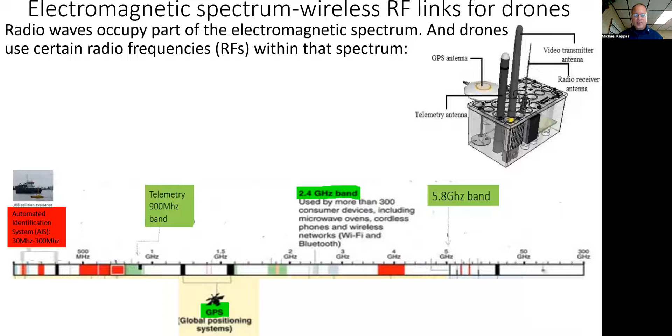30 megahertz to 300 megahertz, and that's for manned and unmanned surface vessels to broadcast their location to other vessels so they don't collide. And that's where that is on the electromagnetic spectrum.

Our last slide in our first class dealt with the microprocessor and the microcontroller, the brains of the unmanned systems. Let's go to a video on this subject.

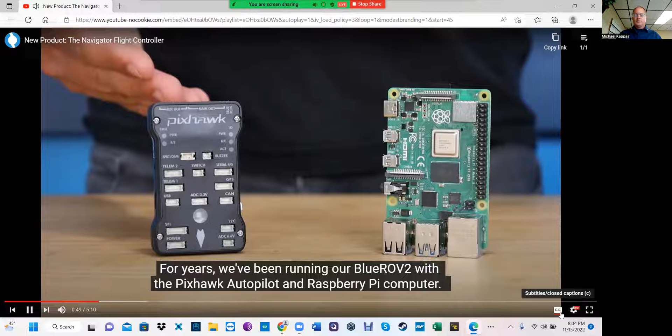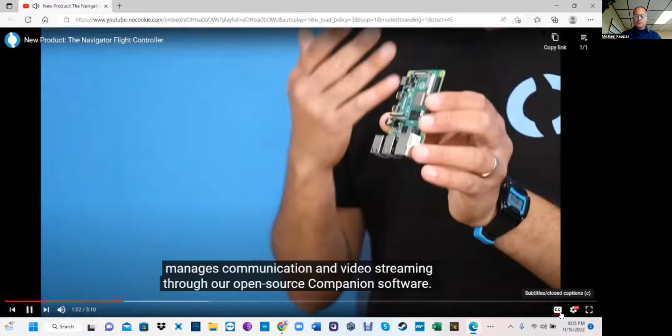For years, we've been running our BlueROV2 with the Pixhawk Autopilot and Raspberry Pi computer. On the Pixhawk runs the ArduSub ROV control software, which is a branch of the larger ArduPilot project that we created and have managed since 2016. The Raspberry Pi computer, meanwhile, manages communication and video streaming through our open source companion software.

The Navigator flight controller replaces the Pixhawk with modern, capable, consolidated hardware. It's a board that plugs into the Raspberry Pi computer's expansion port and transforms it into a fully featured flight controller. It's focused on marine robotics applications like the BlueROV2, but not limited to just that. You can also use it to control drones, ground robots, or anything that moves, really.

Okay, so unmanned surface vehicles. Above water, they use radio waves for communication and imaging. Underwater, they use acoustic waves for communication and imaging.

In just a moment, we're going to see a video on unmanned surface vehicles. Unmanned surface vehicles are more capable, flexible, and cheaper than other vessels. They can vary in weight from tens of kilograms to thousands of kilograms, with speeds that can vary from 1 meter per second to 20 meters per second.

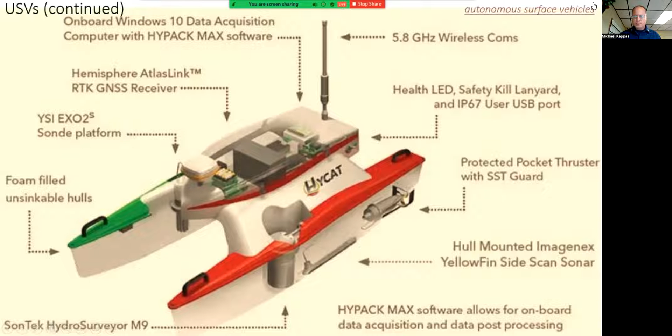USVs can be controlled remotely by a human operator and may also have autonomous functionality. Many USVs can alternate between full autonomy, semi-autonomy, or manual control.

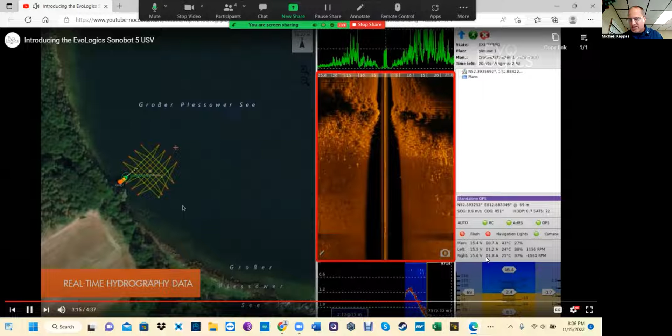Here we see a USV. It is programmed to follow a route, using sonar scanning. Here's the imagery, and here's the telemetry data back from the drone in its environment. The surface vessel is following its program to follow this route and conduct sonar scanning to produce underwater imagery.

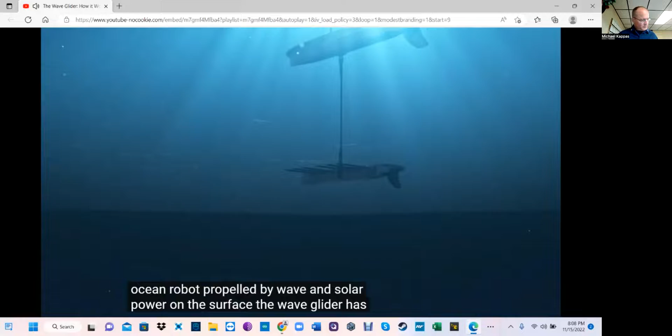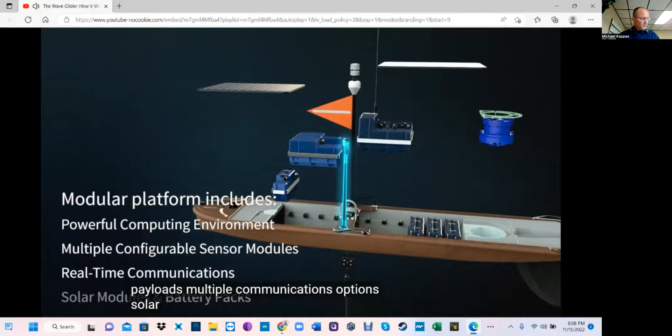And information. The wave glider is designed to capture both. It's the world's most experienced ocean robot, propelled by wave and solar power. On the surface, the wave glider has everything needed for a self-contained data collection system: a powerful computing environment, scalable flexible payloads, multiple communications options, solar panels and battery packs to power it all.

The wave glider's innovation only begins at the surface. Below the surface is a sub attached by an umbilical cord that captures wave motion and transforms it into forward motion. As waves move the float up and down, wings on the sub rise and fall, propelling the vehicle forward. The slightest wave motion is enough. A solar electric thruster is available for extra speed when needed.

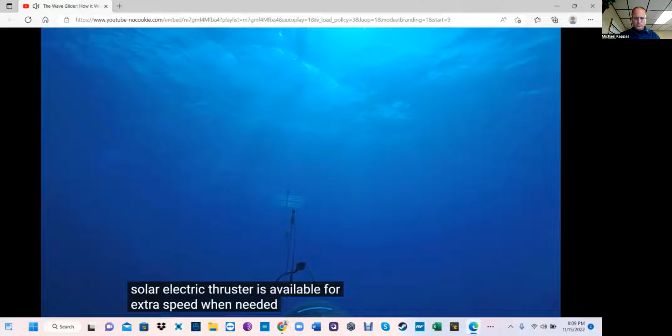Wave gliders can tow large payloads, hit speeds up to 3 knots, and be out at sea for many months at a time. Wave gliders have done some amazing things - they've crossed oceans, survived the toughest of conditions, gathered data from ocean depths to the surface, autonomously communicated with other assets, and even set a world record.

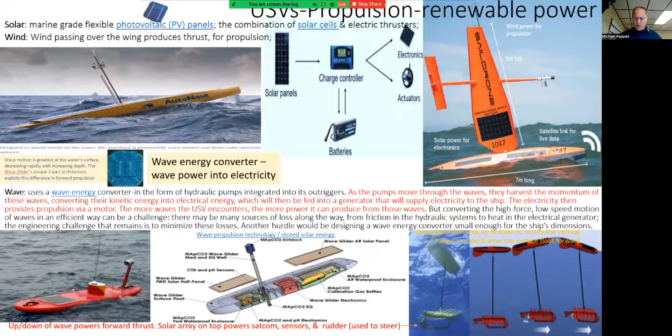Renewably powered unmanned surface vessels are unique. They're distinct from other unmanned systems. Now let's talk about the components of an unmanned surface vessel.

Other components include receiver, battery, microprocessor and or microcontroller, and electronic speed controller. You may remember this from quadcopters. In this particular case, the ESC can be used in cars, ships, and underwater thrusters.

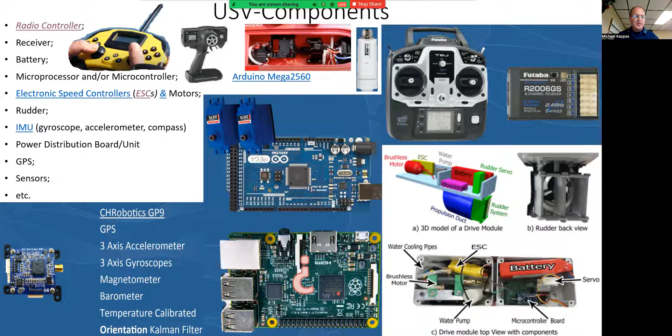Other components include the rudder, the IMU, which includes a gyroscope, accelerometer, and compass, power distribution unit, GPS, sensors, and more. Here's another picture of the components, and you might notice that many of these are the same as those on quadcopters. Others are unique.

For example, cooling pump and cooling reservoir. The ESC or motor of an unmanned surface vessel or unmanned underwater vehicle may need water cooling so that they do not overheat. This may consist of tubes running through the ESC that keep it cool, or a cooling pump, reservoir, or fan.

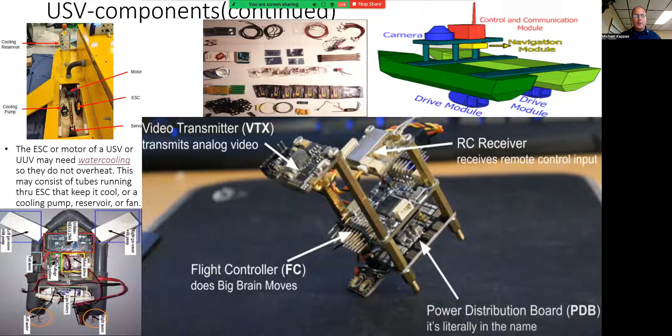Aerial drones have air circulating through the components, so they don't use cooling pumps. Power being delivered with these high voltage systems is something to consider when you're picking out your ESC.

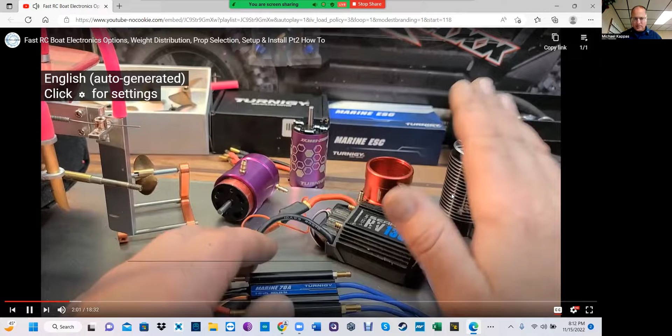Next, you want to make sure you get an ESC that has water cooling. This has water pickups and tubes running through the ESC that keep it cool, as opposed to an ESC that has a built-in fan. Water pickups with water cooling help your brushless system run much cooler and more efficiently.

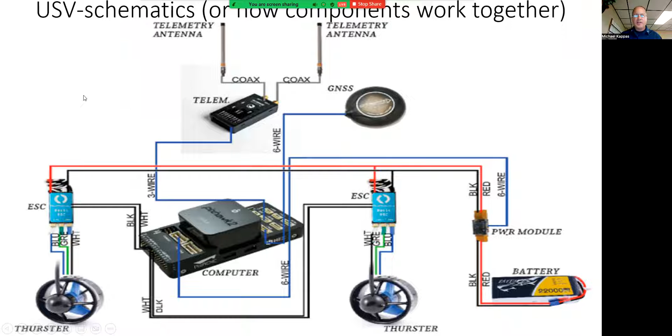Now we're going to get into the motor choices. You want to choose a motor that's going to fit your boat. This is water cooling for maritime drones. Here is the schematic of an unmanned surface vessel, showing how the components work together.

USVs can have space-based sensors, surface-based sensors, and subsea sensors. A USV may have several sensors for imaging and aquatic observation, for example FLIR, forward-looking infrared.

LiDAR, light detection and ranging, is a scanner sensor. It measures the distance to one target point by illuminating it and analyzing the reflected light. LiDAR targets an object on the surface with a laser and measures the time for the reflected light to return to the receiver. The three main components of a LiDAR instrument include the scanner, laser, and GPS receiver.

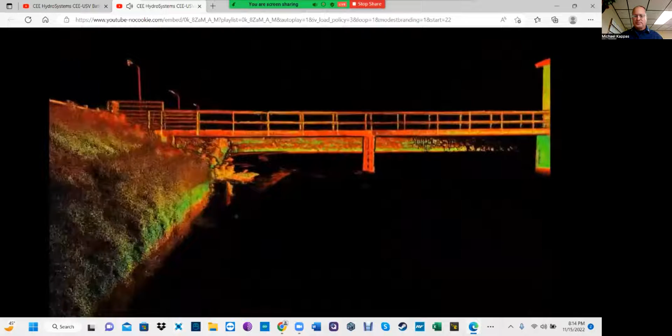Here we see an unmanned surface vessel doing some LiDAR scanning, taking imaging with the LiDAR camera on the mast. And here's the actual image, the LiDAR imaging. This is what it looks like. LiDAR pulses out, and LiDAR returns the form of this image.

USV sensors for navigation: a USV may have several sensors for navigation. Obstacle avoidance is important due to the variability and diversity of the marine environment.

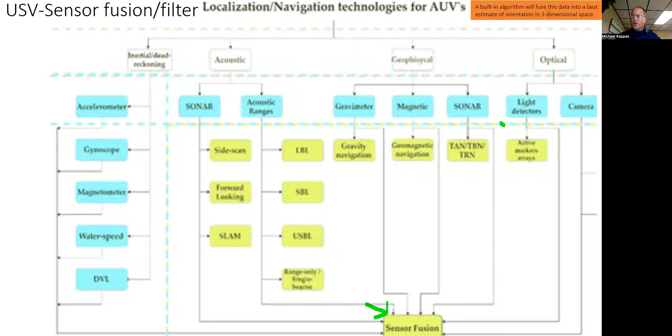Now you may think those are a lot of sensors. How can I handle all that information? Well, you're not alone. The vehicle also has a challenge handling all the information from all these sensors. That's why it has a built-in algorithm that will fuse this data into a best estimate of orientation in three-dimensional space. It's called sensor fusion, a software for sensor fusion of all these sensors, and it's often called a Kalman filter.

Let's talk about software on unmanned surface vehicles. Here's a video from Europe that deals with software, navigation sensors, and aquatic observation sensors, including water velocity. So how does it work?

It all starts with planning a monitoring and treatment mission. The Dronic system is supplied including software and a base station. With these tools, a user can indicate the lake and its contours, upload other data, and hence determine the path in the lake that the Dronic master will monitor once it's deployed.

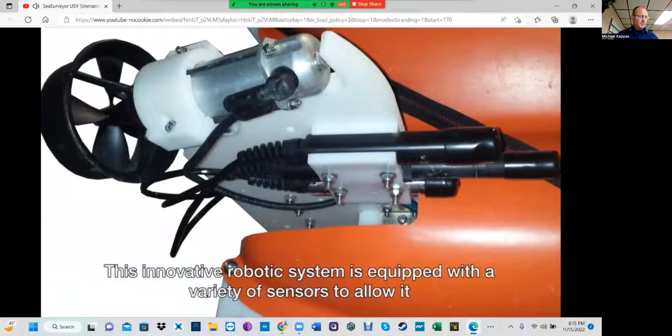After the mission is set, a user-friendly and robust master USV is released in the water. This innovative robotic system is equipped with a variety of sensors to allow it to navigate through the lake independently and to locate the blue-green algae hotspots.

Among others, it's equipped with echo sounders for underwater obstacle avoidance and 3 range sensors for above-water obstacle avoidance. The system communicates with the base station in real-time through a long-range Wi-Fi connection, which makes it possible to interact with the mission at any given time.

A camera on board the system allows real-time supervision from the shore. Through GPS, the Dronic can position itself in the lake and upload water quality data along with its location.

The robotic boat can operate and navigate in 2 modes. Either it follows a predefined track, or it navigates in an adaptive way based on real-time analysis of the recorded sensor measurements. The former mode is used to cover and map the entire area of interest. The latter mode can be used to search for a maximum value of a specific parameter.

The boat is battery powered, and its economic engine design allows it to operate for 8 consecutive hours, since the correct control of the vehicle's actuators is essential for optimal manoeuvrability of the Dronic.

Embedded software and sensors for measuring algal concentrations enable the master USV to track down algal hotspots and autonomously change course, or send the slave USV to the hotspot based on these findings. In addition, software for obstacle avoidance makes sure that the equipment is safe to operate, even when the lake is in use

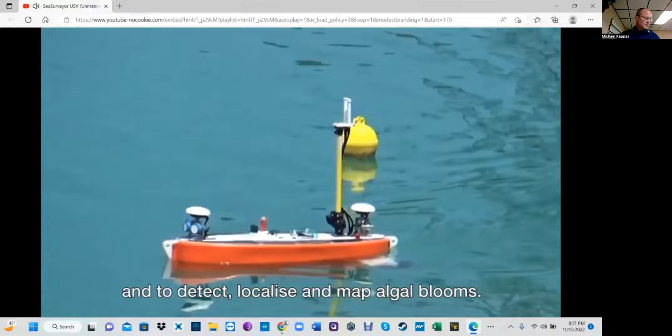recreationally. The master USV is used to analyze the water quality and to detect, localize and map algal blooms. Essential parameters are monitored, such as photosynthetic pigments, chlorophyll A, phycocyanin, turbidity, temperature and depth level.

The monitored data is transferred to the web-based software. Once the master USV has found an algal bloom, a second drone is launched to neutralize the threat using ultrasound waves, providing a direct and localized treatment.

Okay, there's other software. We should be familiar now with the ArduPilot project used with quadcopters. Let's take a look at ArduPilot Mission Planner used with unmanned surface vessels.

Okay, and there's other software. But let's talk about types of unmanned surface vessels. They come in all shapes and kinds, including water rescue robots, robotic buoys, and more.

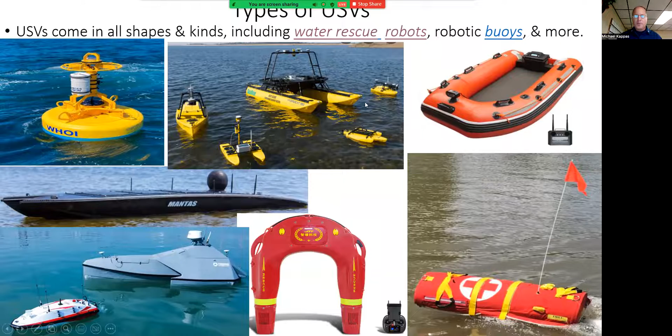Okay, let's move right along. We'll talk about model radio control boats for recreation, for sporting.

All right, finally, Traxxas Spartan, the boat. I get to run it today. Here are my two cell LiPo packs. I could run 6S in this, but I haven't driven it before, so I don't want to go crazy on my first run. Look at 12,800 mAh on this 2S LiPo from Gens Ace. That's going to give me, I'm guessing, around 7 or 8 minutes.

We'll see. Radio's on. Everything's pretty much stock except for some aluminum upgrades I've done to the back. I'll show you what I mean. Just want to get this going.

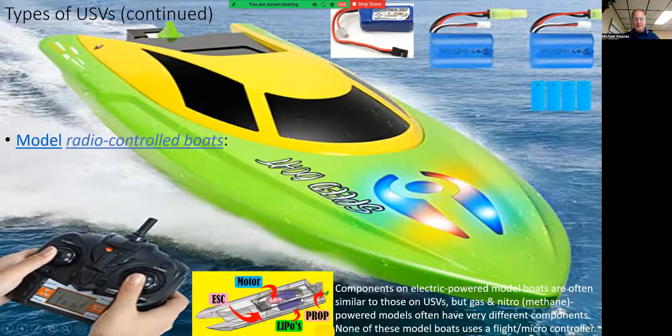Okay, now we're going to talk about unmanned underwater vehicles. These vehicles can be remotely operated vehicles controlled by a remote operator, or autonomous underwater vehicles operating independently from direct human input.

Here are two unmanned ocean explorers. Can you spot the difference? An AUV, or autonomous underwater vehicle, explores ocean depths without any attached cables. Researchers drop an AUV in the ocean and pick it up at a pre-selected position. An ROV, or remotely operated vehicle, is also unmanned, but is connected to a ship by cables. A person on the ship drives it around.

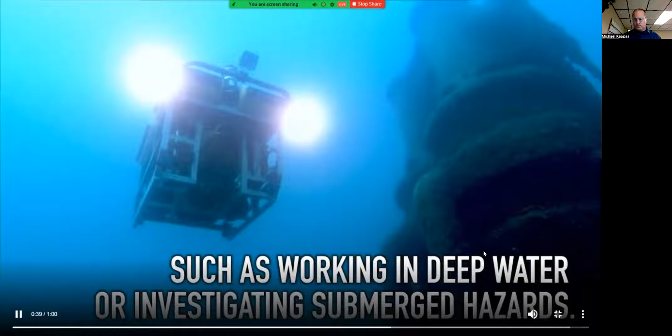ROVs are often used in situations where diving by humans is either impractical or dangerous, such as working in deep water or investigating submerged hazards. ROVs and AUVs carry equipment like video cameras, lights, and robotic arms to grab samples for study. By going where humans can't go, these underwater robots help us safely study the ocean.

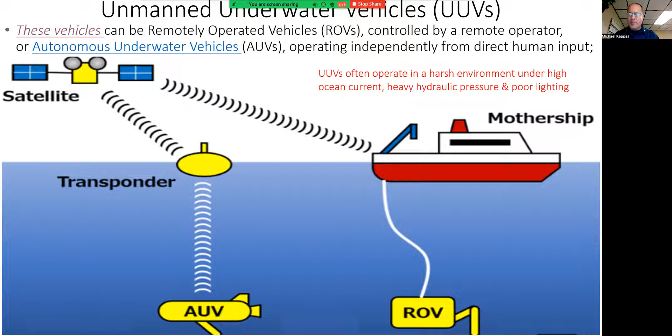Okay, let's talk about thrusters. Autonomous underwater vehicles can rely on a number of propulsion techniques, but propeller-based thrusters are the most common by far. These thrusters are powered by an electric motor, which is powered by batteries. One of the components of this is the electronic speed controller. The T200 is a three-phase brushless motor, which means that unlike a lot of motors, you can't just connect it to power and expect it to spin. It needs an electronic speed controller to work.

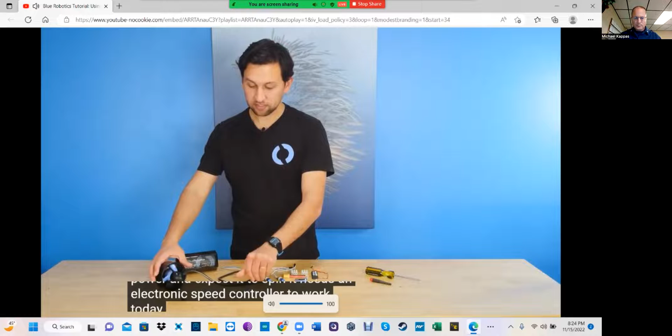Today we're going to be doing that with this basic ESC, which is an electronic speed controller for any sensorless brushless motor, but we're going to be using it on the T200. The basic ESC has a couple wires coming off of it: a red and black wire for power input to the speed controller, and three wires that connect to each of the three phases of the thruster. You can see there are matching colored wires on the thruster.

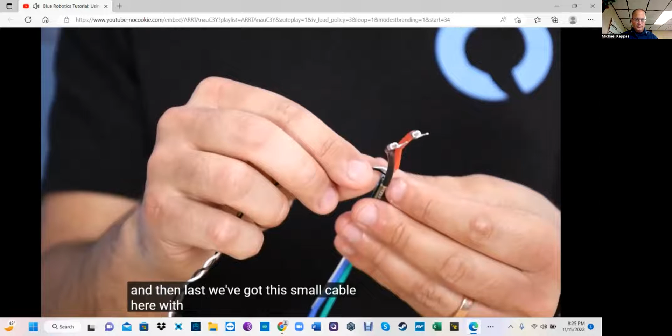And then last, we've got this small cable here with a little connector. This is the PWM input signal that's actually going to control the speed of that thruster. The electronic speed controller interprets the control command sent from the flight controller to the motors. It tells the motors what to do.

Video transmission systems on unmanned underwater vehicles. Underwater real-time video transmission is challenging due to frequency-dependent signal attenuation, ambient noise, multipath distortion, propagation delay, and the Doppler effect. High data rates are required to relay video. Unfortunately, underwater communication has low data rates and very limited transmission bandwidth because it uses acoustic waves instead of electromagnetic waves. AUVs are wireless and cannot transmit live video images.

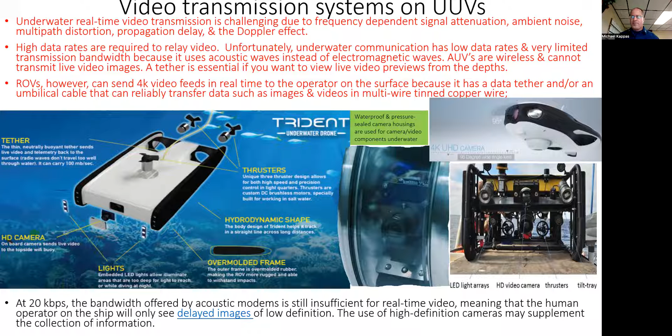A tether is essential if you want to view live video previews from the depths. ROVs, however, remotely operated vehicles, can send 4K video feeds in real time to the operator on the surface because they have a data tether and or an umbilical cable that can reliably transfer data such as images and videos through multi-wire tinned copper wire. Note, waterproof and pressure-sealed camera housings are used for camera and video components underwater.

Okay, let's talk about sensors for imaging and aquatic observation on unmanned underwater vehicles. Forward-looking infrared cannot see through glass or water. Traditional thermal imaging doesn't reach below the surface of the water.

Sonar is long-distance acoustic communication. The speed of sound waves allows sonar to be extremely useful for seafloor imaging. But because of the noise and interference sound waves produce, there are risks to marine life. In addition, background noise and other errant sound waves often interfere with the accuracy of the data. Still, sonar is the most viable choice.

Let's look at light and optical imaging. It has limited range, and it's more accurate in clear water.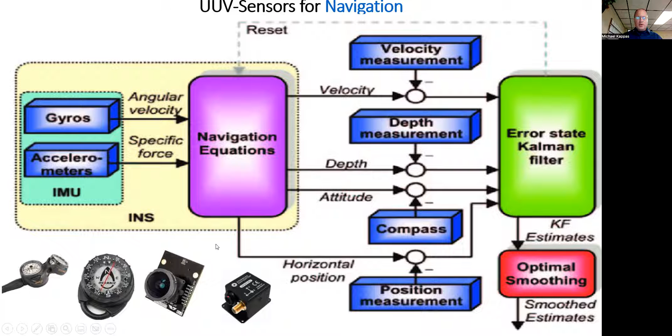Now let's talk about the sensors for navigation in unmanned underwater vehicles. You can use some of the sensors, including a depth gauge, a compass, a camera, and an inertial navigation system.

You can also use sonar for unmanned underwater vehicle navigation. Sonar can be used as an echo sounder to measure the vertical distance between the vehicle and the hard bottom, as a sector scanning sonar to scan for objects horizontally around the vehicle, and for acoustic positioning.

Let's take a refresher on what acoustic positioning is, lat-long readout. Now, GPS radio signals don't pass through water, so we have to use this special system called USBL, basically a set of sonar beacons that allow for the triangulation of the ROV, and a GPS chip at the controller lets the system correlate data and create an accurate lat-long of the position of the ROV.

Now let's look at this video of the acoustic positioning systems that can be used for navigation of the underwater vehicle.

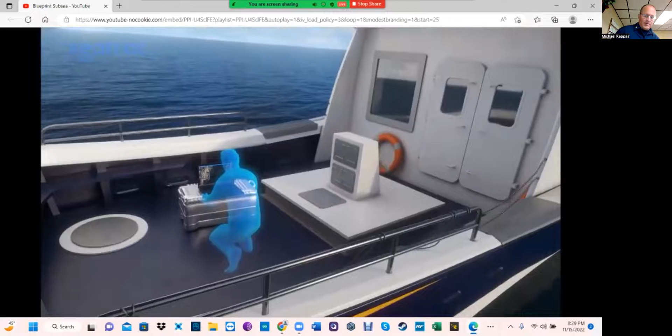Underneath the boat, they've got a transducer. A transducer sends out sonar signals in the form of sound waves and receives return echoes.

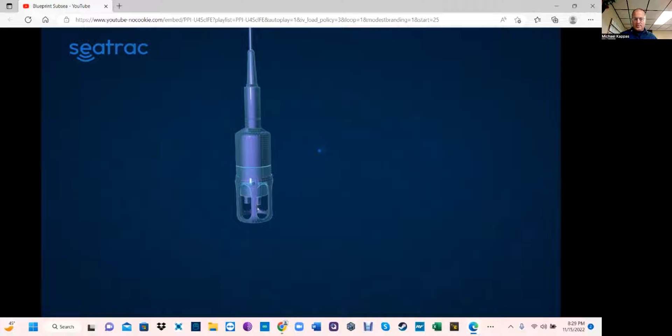You're going to see this right here in the form of binary data. And on the ROV, it has a beacon, a transponder, which receives acoustic signals and transmits a unique return signal.

You'll notice there's also a diver and an autonomous underwater vehicle that are also getting in on the action there.

Now we're going to look at side scan sonars. They come in two forms. The first is towed by this surface vessel. There's a cable underneath this surface vessel towing a side scan sonar, which is conducting sonar imaging underwater to produce an image, which you're going to see on your screen here in the upper right-hand corner. See the image underwater? That's a side scan sonar, being towed by the surface vessel.

And here's another example of a side scan sonar, but this time it's embedded in an autonomous underwater vehicle. These are all acoustic positioning systems.

Lastly, there's multi-beam imaging sonar, and this is on a remotely operated vehicle. You'll notice this remotely operated vehicle has the cable connecting it to the surface. Through that cable comes power from the surface and instructions from the pilot. Back to the pilot from the ROV are the data that the underwater vehicle collects, including video images and sonar imagery. This is multi-beam sonar scanning.

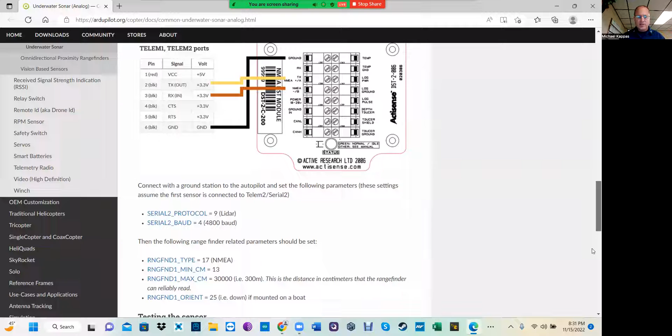Q Ground Control, the background on this slide has QGroundControl software, you can see right there. Let me also mention that ArduSub is the sub-project under ArduPilot for underwater projects.

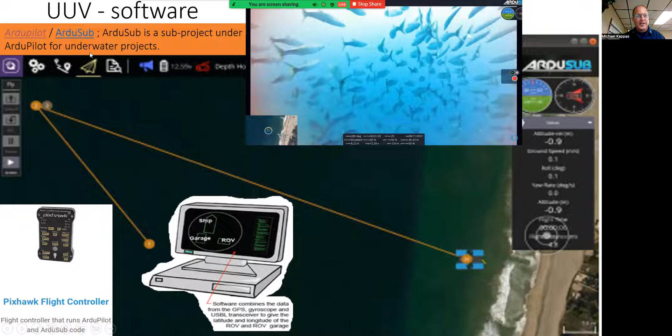Moving right along, unmanned underwater vehicles use waterproofing and pressure proofing of components. That's why you need water cooling, because they're encased, so components sometimes heat up and need to be water cooled.

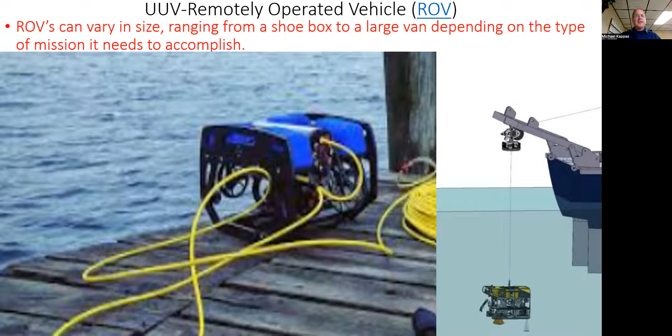Now we're going to talk specifically about one type of unmanned underwater vehicle, the remotely operated vehicle. ROVs can vary in size, ranging from a shoebox to a large van, depending on the type of mission it needs to accomplish.

ROVs operate in midwater or very near the bottom. There are four main types of ROVs: a work class ROV, a light work class ROV, an observation class ROV, and a micro or mini ROV.

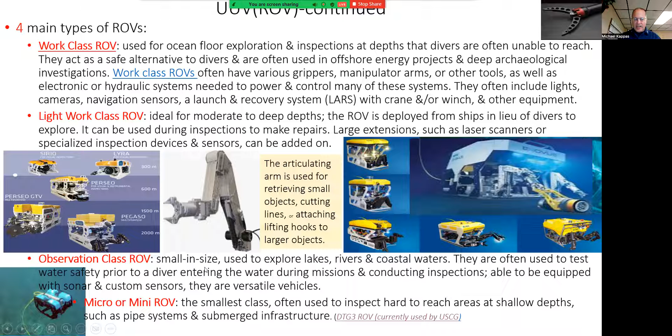Let's take a look at a mini ROV that's used by the Coast Guard. This is a Deep Trekker DTG-3.

All-in-one control system. Seamless sensor and sonar integrations. Simultaneous integration of sonar and USBL. ROV on moving map display, real-time route and log. That's getting that telemetry back.

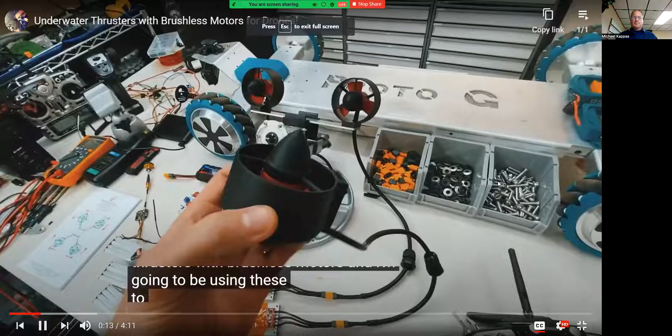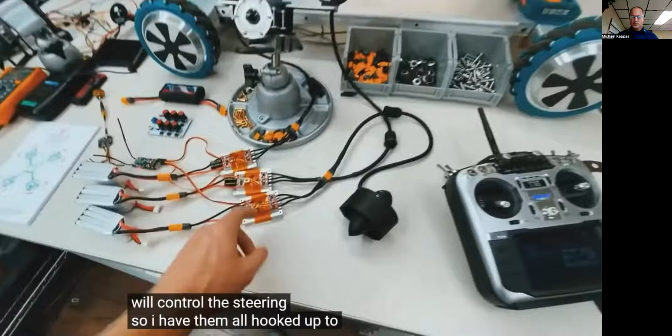Hey guys, so I found these underwater thrusters with brushless motors, and I'm going to be using these to design my underwater drone, and I'm going to make the drone look kind of like a stingray. I'm going to have two thrusters under the wing, and then a third thruster in the back to control the tilt of the drone, and the other two will control the steering. I have them all hooked up to the ESCs here. To use these, you want an electronic speed controller that is reversible, so you can reverse the direction of the thrust underwater.

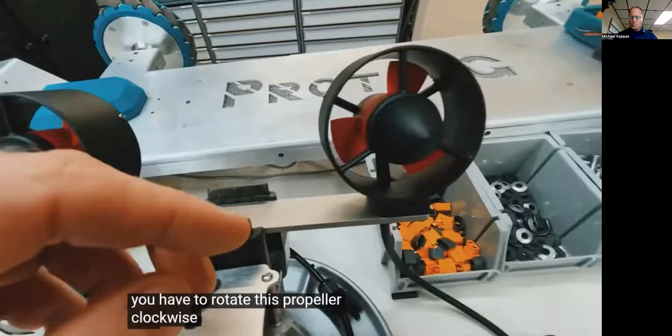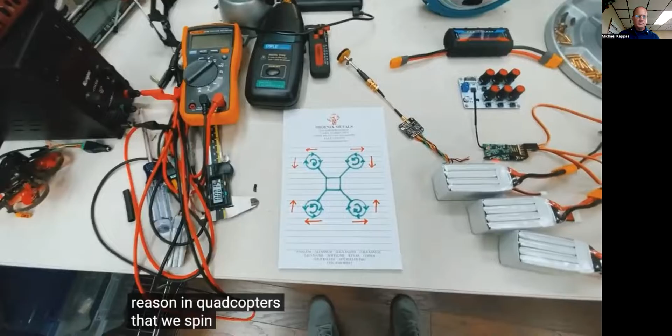I also wanted to go over the direction of rotation. If you look closely, these two propellers are mirrored images of each other. Depending on which way you look at this, to produce forward thrust, you have to rotate this propeller clockwise, and to produce forward thrust out of this one, you rotate the propeller counterclockwise. The reason for this is the same reason in quadcopters that we spin the propellers in different directions. When you spin a motor, there's a reactionary force opposite to the direction of rotation, and this is how we control the yaw with the quadcopter as well. So for the underwater drone, if I had two motors spinning the same direction, it would want to drift, so having the two motors spin in opposite directions cancels out those reactionary forces.

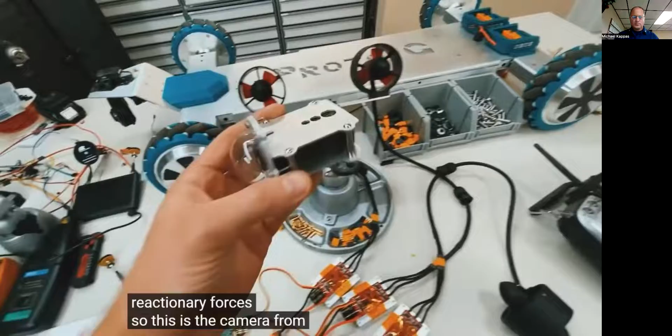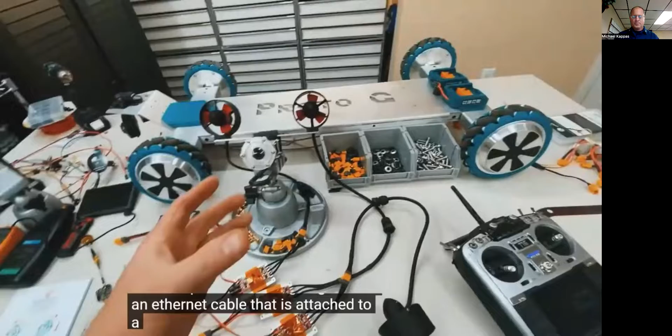So this is the camera from the last video, and to get the live feed to the headset and the FPV monitor, I'm going to have an Ethernet cable attached to a flotation device, which will have the antenna for the FPV transmitter, as well as the antenna for the actual control of the ESCs.

That way, if I give it a 25-foot tether, I can basically have a tetherless experience where the drone can go out a mile and then dive 25 feet. If I put a 50-foot tether on it, it'll dive 50 feet. But I'm going to actually start with a 25-foot tether.

To demonstrate the reactionary force, we can use this motor that's not connected to anything. You can see it's rotating in the opposite direction that the propeller is spinning.

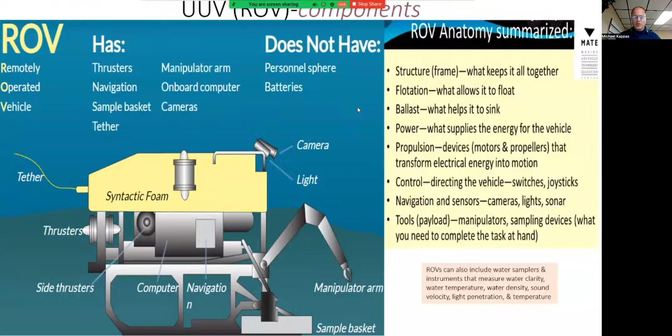Components of the ROV. Here's some more components, and let's look at another video describing components of an ROV in detail, comprehensively, more or less.

The BlueROV2 is a remotely operated underwater vehicle with a camera, lighting, and thrusters that allows you to explore, inspect, and study things underwater. For the purposes of this video, I'm going to assume you already know what an ROV is, and I'll focus on the specific features of this ROV.

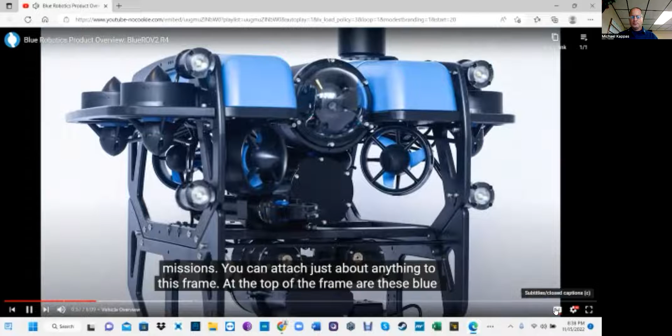Let's get into it. The ROV frame has 2 side panels, a bottom panel, and 4 center panels, creating a rectangular structure and providing places to mount the enclosures, the thrusters, the buoyancy, and the ballast. This design is inspired by work-class ROVs, which typically have a similar structure, allowing things to be easily added to the ROV for different missions. You can attach just about anything to this frame. At the top of the frame are these blue fairings, which hold polyurethane buoyancy foam, used to give the vehicle additional buoyancy.

On the bottom here are stainless steel ballast weights. They can be added, removed, or moved around to balance the vehicle and maintain neutral buoyancy based on what you have installed. The buoyancy on top and the ballast on the bottom makes this vehicle statically stable, meaning that when it sits in the water, it always wants to sit upright and stable.

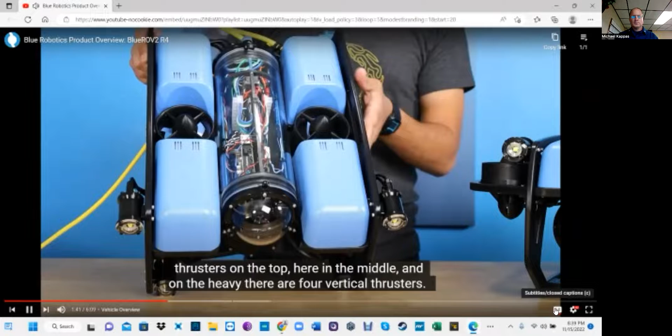There are 6 thrusters in this standard configuration, and 8 thrusters in the heavy configuration over here. On the standard, there are 2 vertical thrusters on top in the middle, and on the heavy, there are 4 vertical thrusters. Those vertical thrusters help you go up and down.

Then there are 4 thrusters on the bottom in what's called a vectored configuration, where each of these thrusters is at roughly a 45-degree angle. The thrusters themselves don't rotate, but by varying thrust on each thruster, you can create a thrust vector in any direction. That means you can drive the vehicle forwards, sideways, or anywhere in between, like off to a 45-degree angle.

This configuration is ideal for driving in real-world conditions where there's often currents coming from different angles, and you want to move the vehicle sideways as you inspect or view a surface.

At the center of the ROV are 2 enclosures. These were both updated to our improved locking enclosure design in the R4 version of the ROV. On top is the electronics enclosure, and down here on the bottom is the battery enclosure.

The electronics enclosure has a camera at the front with 1080p high resolution and sends a live, low latency stream up to the surface for the pilot view. Behind that are the rest of the electronics.

Right here is the Navigator flight controller running BlueOS, which is also a new improvement on the R4 version of the ROV. The Navigator consists of a Raspberry Pi computer with an array of added sensors, inputs and outputs, and expansion capabilities. It uses its onboard sensors to determine the attitude and heading, and outputs to the thrusters to automatically stabilize and control the vehicle based on pilot inputs.

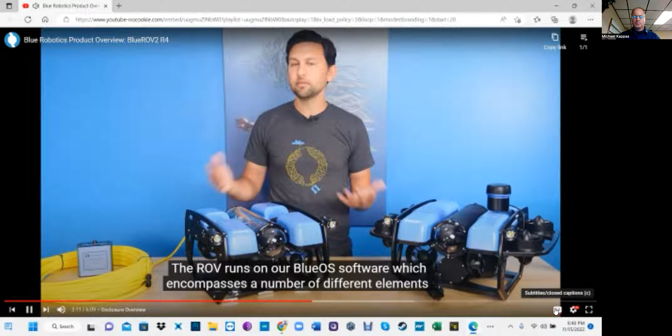The ROV runs on our BlueOS software, which encompasses a number of different elements and is open source and user modifiable for your application if necessary. BlueOS manages the operation of the vehicle, including the ArduSub control system software, the camera, the communications through the tether, and it has expansion features to support other sensors, sonars, and payloads.

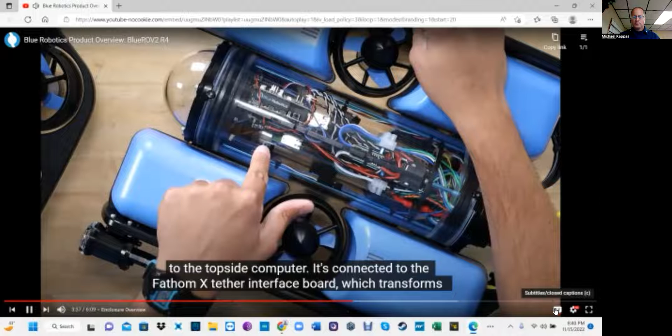The Navigator connects to the Ethernet network that connects the vehicle to the surface and forwards the video stream and control data to the topside computer. It's connected to the Fathom X tether interface board, which transforms that Ethernet connection into a long-range connection over just 2 wires. And last, there are 6 speed controllers mounted at the back, connected to the thrusters and to power.

On the outside of the enclosure, at the back, are cable penetrations leading to the thrusters and lights, as well as a pressure and temperature sensor, a pressure relief valve, and several blank penetrations for expansion.

Below the electronics enclosure is the battery enclosure, which holds a battery during operation. The battery typically gives you about 3 to 4 hours of operation in normal conditions.

Starting with the new R4 version of the ROV, you can choose either acrylic plastic or aluminum enclosures. The acrylic enclosures are rated to a depth of 100 meters, and the aluminum enclosure increases that to 300 meters.

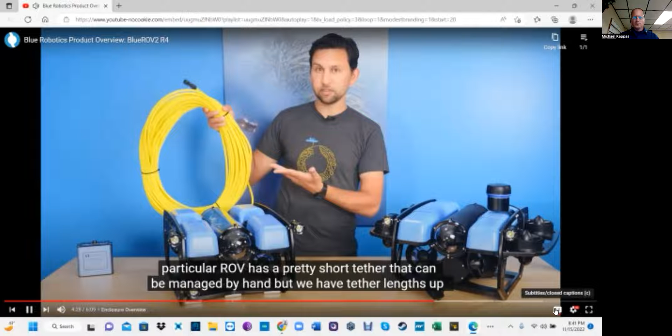The tether on this vehicle runs from the vehicle to the surface. This particular ROV has a pretty short tether that can be managed by hand, but we have tether lengths up to 300 meters, and we have an optional tether spool to manage those longer lengths of cable.

At the surface, this cable plugs into the Fathom X tether interface, or FXTI box, which has a connector for the tether and a USB connector to go to your laptop computer.

Once you're connected and powered up, you connect to the vehicle using the QGroundControl software. That one's also an open source software application, and it runs on Windows, Linux, or Mac, and provides live video stream, live data view, ability to adjust the parameters on the vehicle, and an interface to any gamepad or joystick controller to pilot the vehicle.

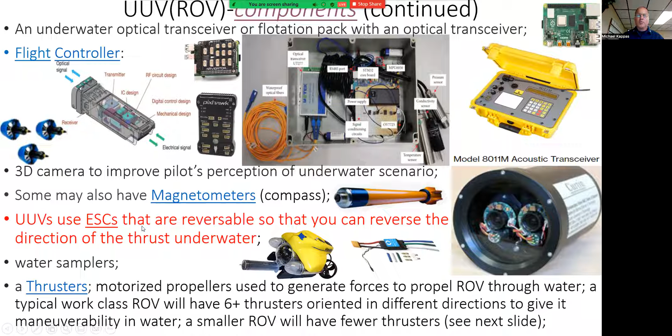Each vehicle can be different and so can have different or unique components. Unlike aerial drones, unmanned underwater vehicles use electronic speed controllers that are reversible so that you can reverse the direction of the thrust underwater. Brushless direct current motor.

This, together with the batteries, is the heart of the ROV. It is the element which gives the propellers the power to generate thrust. Thrusters generate propulsion for the ROV. Most work-class ROVs use a combination of electric and hydraulic power underwater.

The frame of an ROV provides a structure to attach the thrusters, camera, lights, tether, and other components of the ROV. ROVs are often assembled using a box-shaped steel, aluminum, or plastic polyvinyl chloride frame.

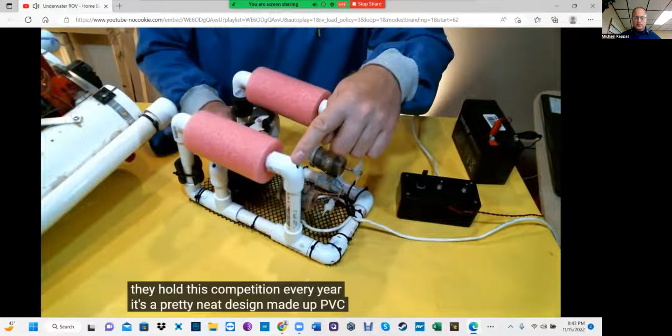This is a pretty neat little ROV. It was developed by the Office of Naval Research as part of their SeaPerch student competition, which they hold every year. It's a pretty neat design made out of PVC pipe, with some flotation foam on it, and 3 motors housed in film canisters filled with wax to seal.

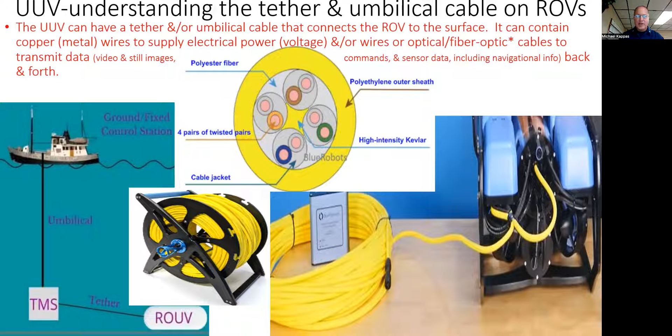The tether: the unmanned underwater vehicle can have a tether and/or umbilical cable that connects the ROV to the surface. It can contain copper metal wires to supply electric power, and/or wires or optical fiber optic cables to transmit data back and forth to the surface.

Let's talk about the radio transmitter. Surface controls can range from something that looks like the control room for a spaceship to something as simple as a smartphone. In any case, the surface controls provide a physical interface for the pilot to control the vehicle and a display of feedback from the vehicle, including the camera view.

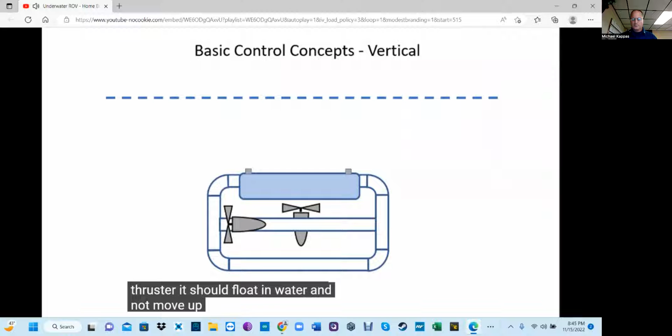Let's talk about movement of the ROV. Vertical motion is achieved using the up and down thruster, the thruster in the middle. I activate the thruster, shown here by the green propeller, and it pushes the ROV down. If I stop the thruster, it should float in water and not move up and down if it's somewhat neutrally buoyant. I reverse the thruster, shown here in red, and the system moves back upwards.

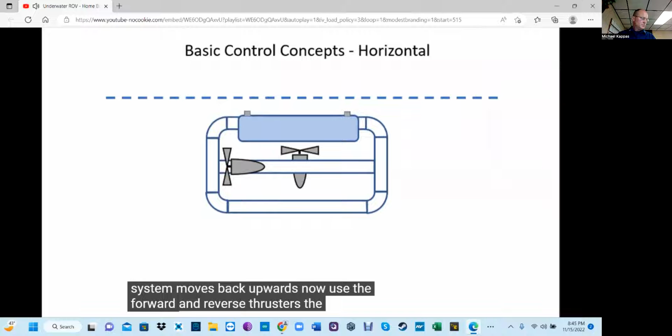Now I use the forward and reverse thrusters, the thruster on the left, for horizontal motion. I activate the motor, shown here with the green propeller, and it pushes the ROV forward. If I stop the motor, it stops in place. If I reverse the motor, shown here in red, the ROV moves backwards.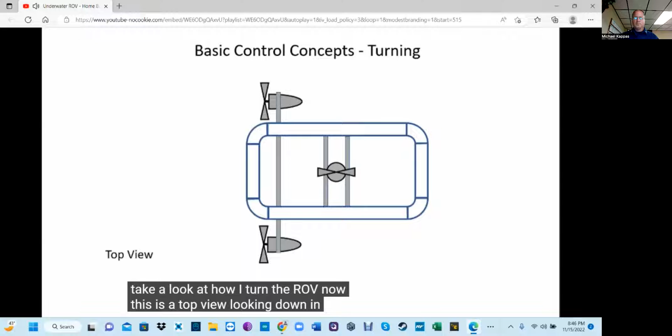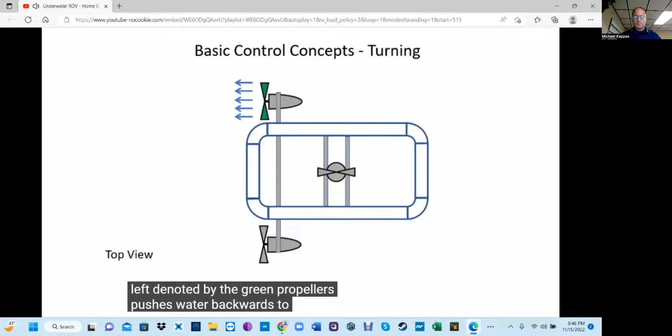Now let's take a look at how I turn the ROV. This is a top view looking down. In the middle you see the vertical up and down thruster. On the left hand side you see the 2 forward and reverse thrusters. To turn right, I fire up the thruster on the left, denoted by the green propellers, which pushes water backwards to the left, and the ROV turns to the right. Turn the thruster off and it stays in that position.

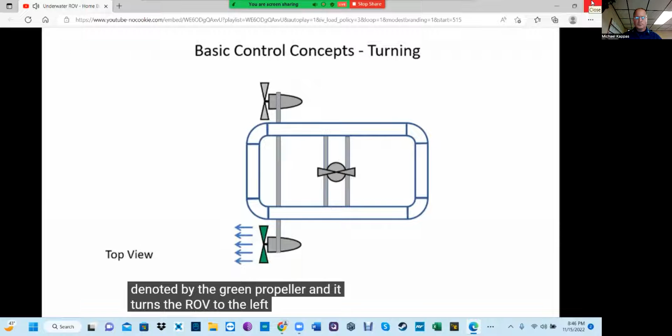Fire up the right-hand thruster, as denoted by the green propeller, and it turns the ROV to the left. Now, if I want to turn quickly, I put one thruster forward and one thruster in reverse, as you see in the directions of the two propellers, and that makes the ROV turn quickly.

Now let's talk about the second type of unmanned underwater vehicle, the autonomous underwater vehicle, or AUV. An autonomous underwater vehicle is a robot which travels underwater without requiring input from an operator. It can travel by drift, drive, or glide. Here's another definition: an unmanned, untethered underwater vehicle that carries its own power source and relies on an onboard computer and built-in machine intelligence to execute a mission consisting of a series of pre-programmed instructions, potentially modifiable online by data or information gathered by the vehicle sensors.

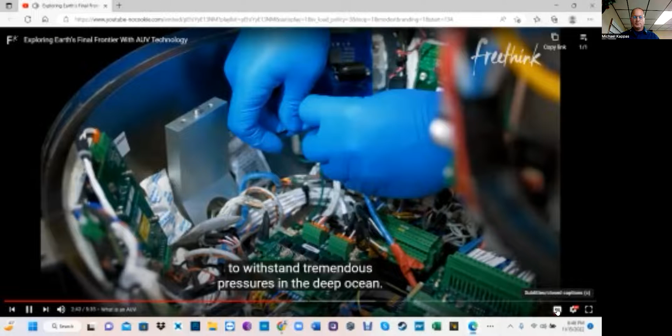We can survey as much as 2.5 kilometers wide per AUV, so we can cover a lot of ground, and we can take sonar imagery down to 3 to 5 centimeters. But the average ocean depth is over 10,000 feet, meaning AUVs involved in bathymetry or search and recovery missions have to be incredibly tough. The vehicle has to be designed to withstand tremendous pressures of the deep ocean. There's no light, so if you want to take a picture you've got to bring your own illumination. The other challenge is communication.

The deep ocean is pitch black. There's no internet, no cell service, no GPS. And with ocean currents, AUVs aren't able to maintain fixed, predictable positions. Once you send an AUV on a mission, for all practical purposes, it goes dark.

Underwater communication is done acoustically with sound. The bandwidth is really low, so the amount of information you can send through the water column is really small. What you've got is worse than 90s dial-up internet by orders of magnitude. And you're trying to send really complex information about where they're located in a 3D space.

But new AUV technology aims to skirt this limit. An AUV carries its own power supply and has no physical link to the surface.

Autonomous underwater vehicle: Loco is a visually guided underwater robot built from approximately $4,000 worth of components, largely off-the-shelf and 3D printed. The robot's hardware and software design is intentionally modular and as open as possible. With a depth rating of 100 meters, a maximum speed of 1.5 meters per second, and a typical battery life of 2.5 hours, Loco is an AUV designed to lower the barrier of entry into underwater robotics research. The robot is equipped with human interaction capabilities, including gesture recognition, diver following, and robot communication via motion.

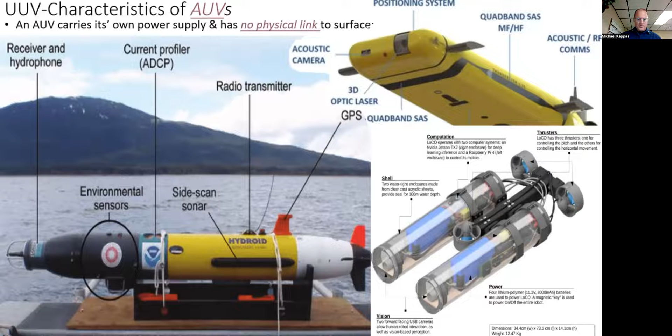Here are the components, an example of some of the components of an autonomous underwater vehicle. AUVs have servos, just like quadcopters, servos that control rudders and fins.

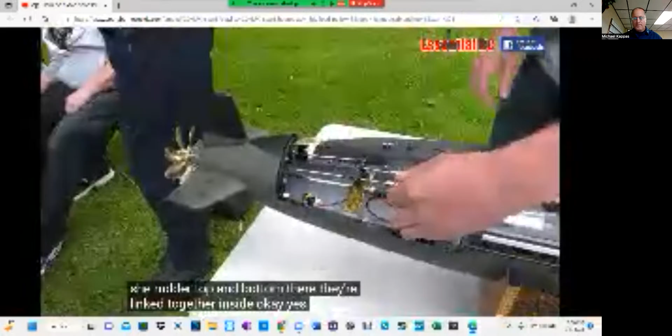While most AUVs use rechargeable lithium batteries, some of the larger AUVs use aluminum-based semi-fuel cells that are higher maintenance. The most common propulsion methods for AUVs are propeller-based thrusters and Kort nozzles, usually powered by electric motors.

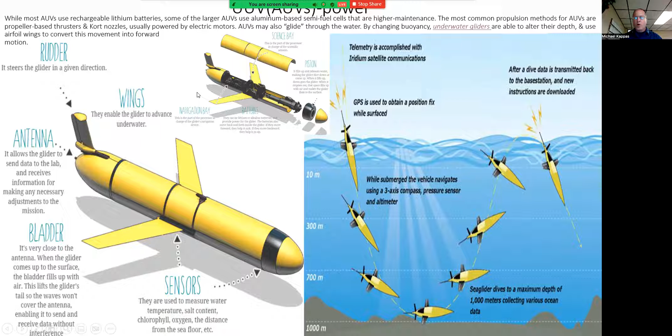AUVs may also glide through the water. By changing buoyancy, underwater gliders are able to alter their depth and use airfoil wings to convert this movement into forward motion. Here we have a sample in yellow of an underwater glider, but let's take a look at another underwater glider in this video.

Underwater gliders are one type of autonomous underwater vehicle. They don't have propellers outside; they work based on change of buoyancy. For long endurance operation, they can go six months with one battery charge. They have two problems: they are slow and they are not very maneuverable.

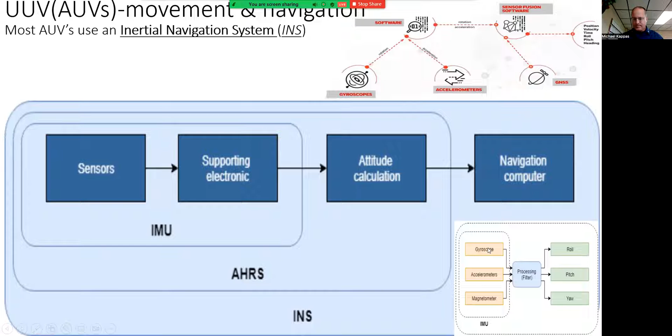Okay, they're unique. Let's talk about movement and navigation on AUVs. Most AUVs use an inertial navigation system. It has a Kalman filter in it, with sensor fusion built into the device that gives you a much more accurate output. It's a very high quality device generally.

So an INS is going to include a Kalman filter, which consists of how the sensor itself fuses all of the individual parts into one and gives you a navigation output with everything incorporated. This often includes gyro, magnetometer, and accelerometer, and in an INS solution it also includes GPS. It'll take those things and give you a navigation output that your robot can use to understand where it is in the world.

Okay, 5 types of forces influence the motion of an unmanned underwater vehicle: drag, weight, buoyancy, thrust, and lift. Does that sound familiar? Because except for buoyancy, those are the same forces that influence an aerial vehicle.

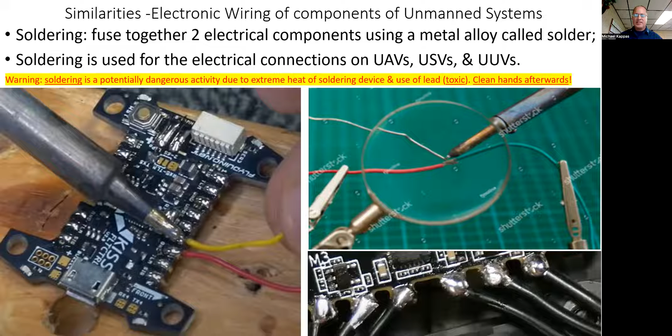Similarities: electronic wiring of components of unmanned systems. Soldering is the fusing together of 2 electrical components using a metal alloy called solder. Soldering is used for the electrical connections on unmanned aerial vehicles, unmanned surface vessels, and unmanned underwater vehicles. Warning: soldering is a potentially dangerous activity due to extreme heat of the soldering device and the use of lead, which is toxic.

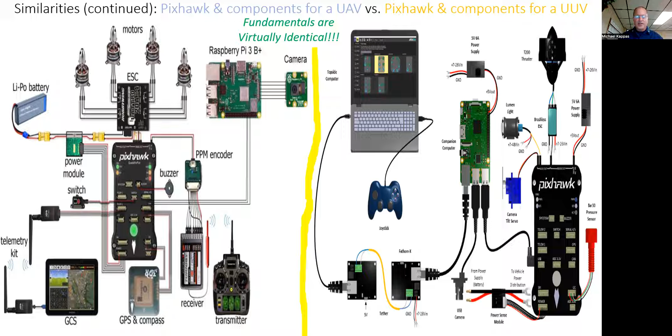Okay. And to close out this class, I'm going to leave you with a summary of the main similarities and differences amongst unmanned systems. And that finishes our class for today. Thank you for your attendance.

All right, well, thank you very much, Michael. Quick question. In your experience, whether you're trying to rebuild or refit, whether it's an aerial drone or underwater, have you run into any supply chain issues with getting parts, whether for transponders, microcomputers like Raspberry Pi 3, or even brushless motors? I know some parts have been on back order, and I'm wondering if it's affected you or any teams you've worked with in refitting your vehicles.

Okay, good question. One of the amazing things about the times we live in is that much of the components and equipment for these unmanned systems have become cheap and widely available. It's a growing industry. But there's also a lot of demand now as more people get involved in this field, so you do occasionally have that problem where a whole bunch of people want the same thing. A particular company could be out of stock, in which case you could look at another company, or just wait. But you have those two things going on.